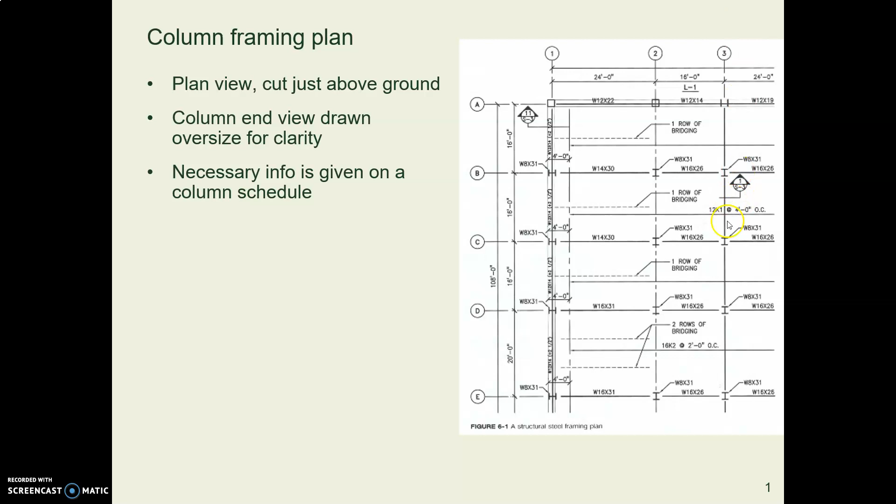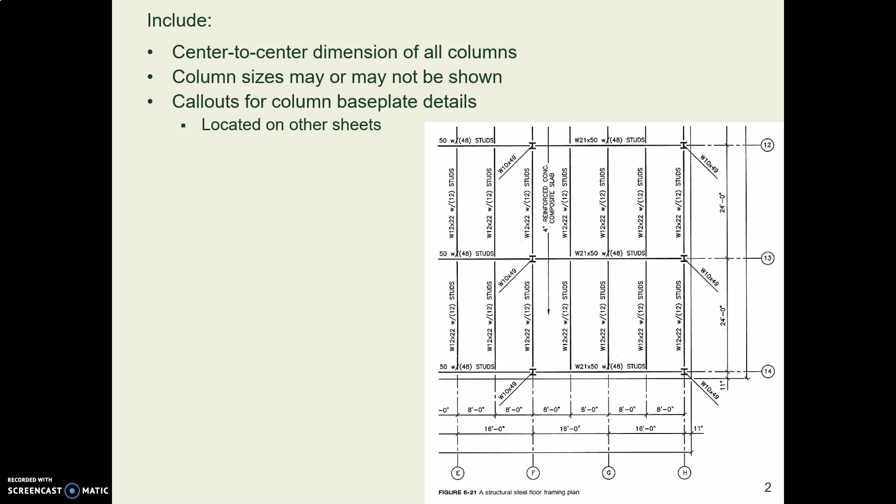There's another document called a column schedule where we get more information about them. We also want to make sure we give all the dimensions center to center, because that's what all these grid lines are based on. And there are base plates, column base plates at the bottom of the columns, but there are separate drawings for those as well as some information on the column schedules for those.

Here's a column schedule for a small building. Now this schedule is created by the designer. It communicates information to the fabricator about what size of steel are they going to use, what length do they cut it, and here's information about what size is the base plate.

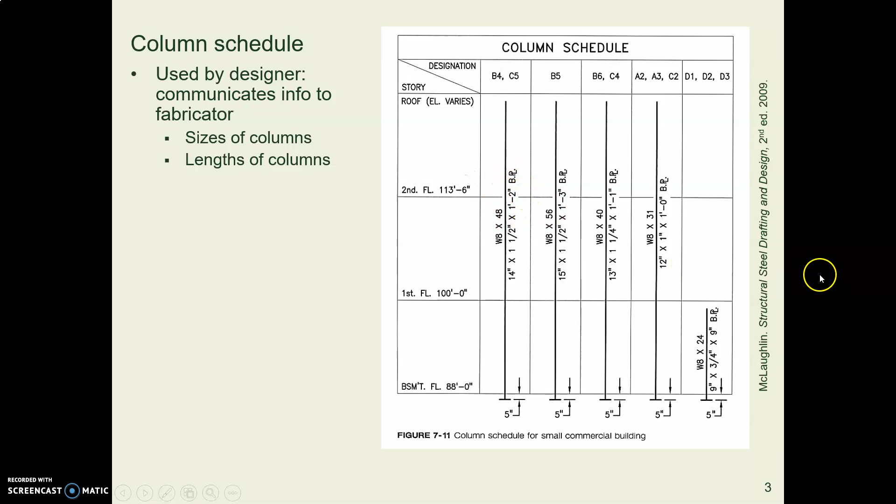Here's a column schedule for a little bit bigger building. Notice we have the grid line markers across the top, so we've seen grid B2 before. There's a bunch of them. And what else? Sizes of the columns are given, and down at the bottom here, here are the specs about the base plates. Notice that these are heavy pieces of metal.

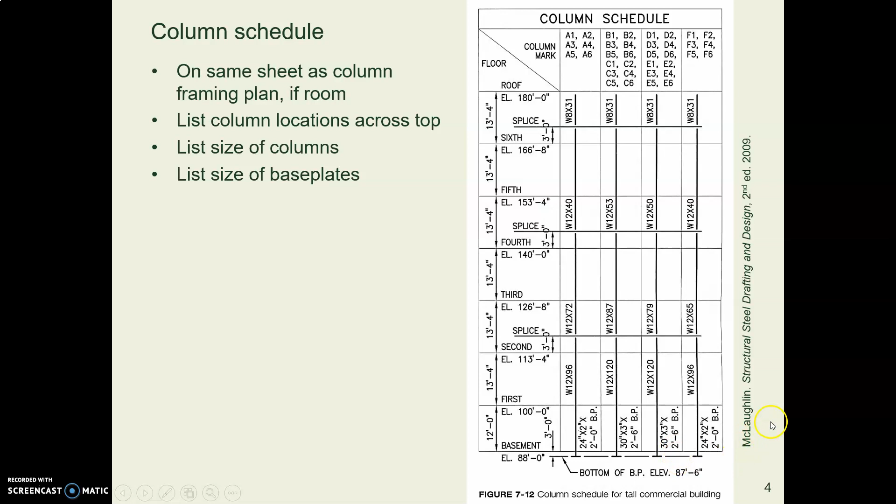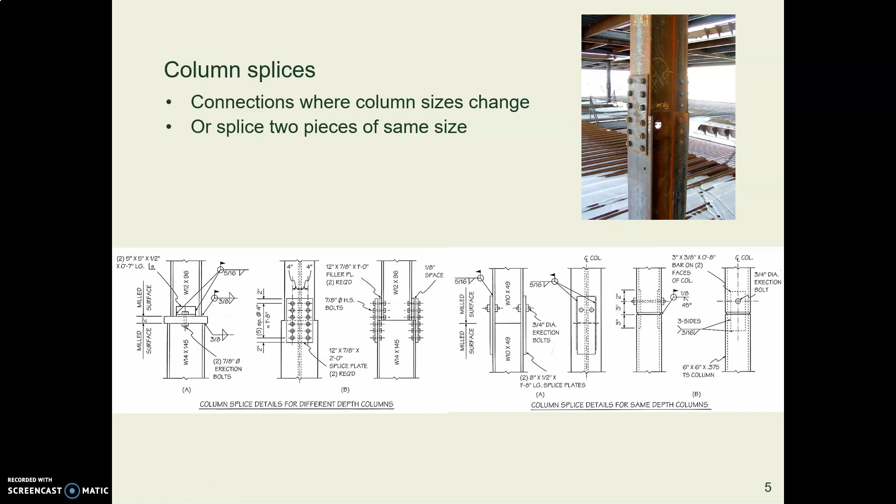The splice, the column splice, happens where two pieces of columns have to get attached together. And they might be different sizes, they might be the same sizes. But obviously, if you have a 20-story building, you cannot run one piece of column all the way up there. A column is not made that long, so you have to splice it.

Here's the same column schedule again that we saw earlier. And notice that the drafter or the designer has called out the location of the column splice. Looks like every 2 floors there's a splice. And notice that it's about 3 feet above the floor level.

So that's interesting. That is much easier to get to for the steel worker to make the splice connections. And then you don't have other stuff that happens in the connection between floors. It doesn't get in the way of that.

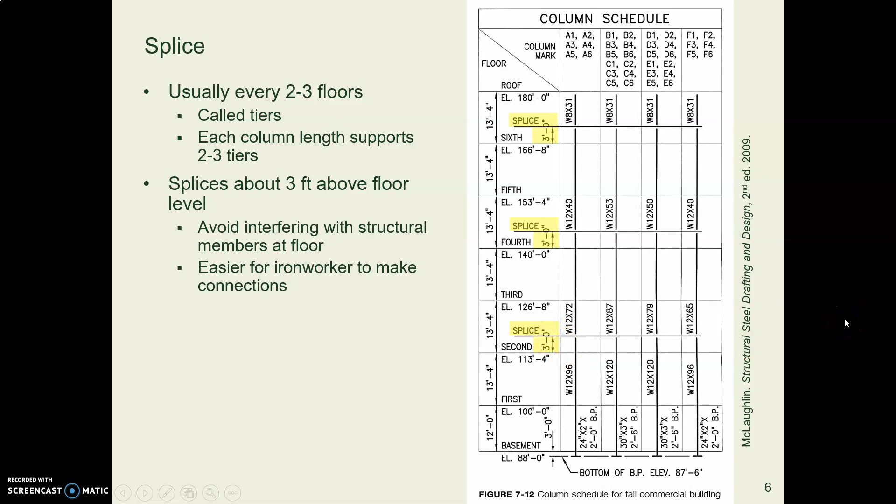Think about how heavy the pieces in a building are. So by the time you get to the top of a building, you just have the top floor being supported by the columns. There's not much weight up there. But the floor below that has to support it and another floor, and the floor below that supports 3 floors, and blah, blah, blah, all the way down to the bottom of the building, where those columns at the bottom of the building are carrying very heavy loads.

So what we do is we have bigger pieces of steel for the bottom columns, and we get gradually smaller and smaller as we go up. Why not make them all the same size, you ask? Well, we buy steel by the pound. And you've seen some of those pound sizes for wide flanges. 1 foot of steel can rack up a bunch of pounds quickly. So if we can cut down the amount of steel we use, we cut down the cost. So we try to minimize, we try to optimize and use just enough steel but not too much.

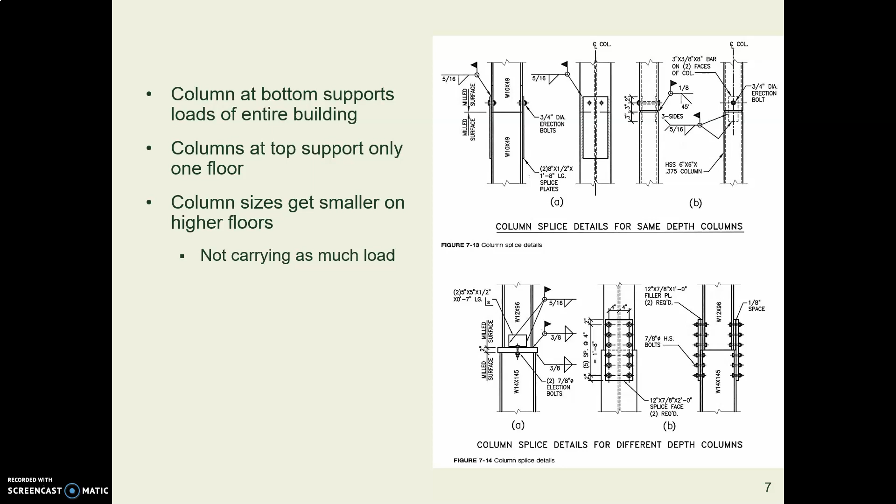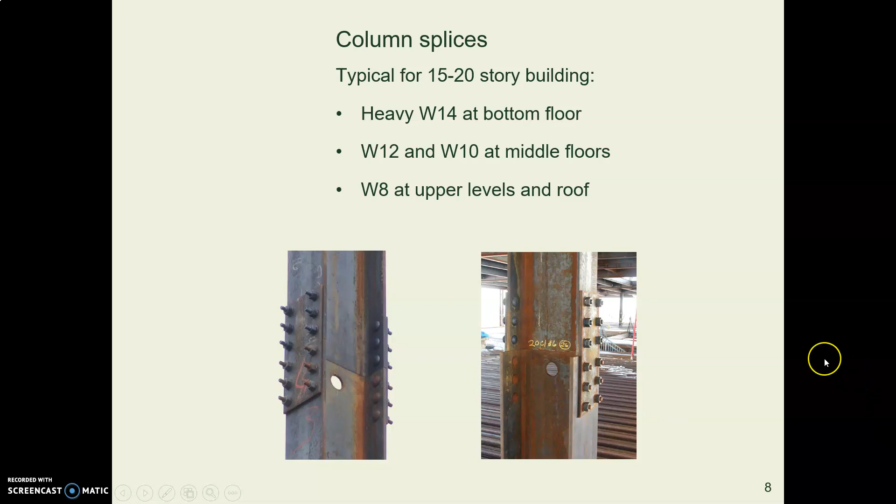Here are a couple of column splices. It looks like the one on the left are 2 same size wide flanges. The one on the right are different size wide flanges. And here is a drawing out of the AISC Steel Detailing Manual.

Another time when we talked about structural steel shapes, we commented that for a given size of depth, like all 8-inch wide flanges, the inside of the flanges is the same size. And so here is the steel detailing manual saying that. And they are telling the detailer, be careful not to offset, not to make these things off center. Be sure to keep this stuff lined up.